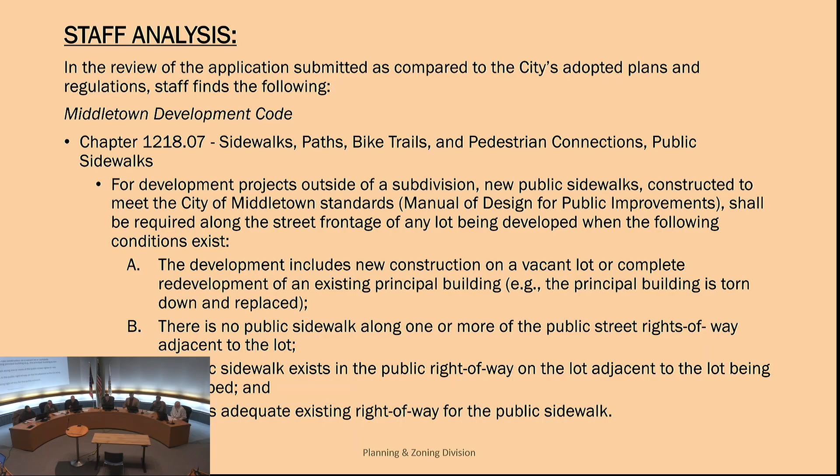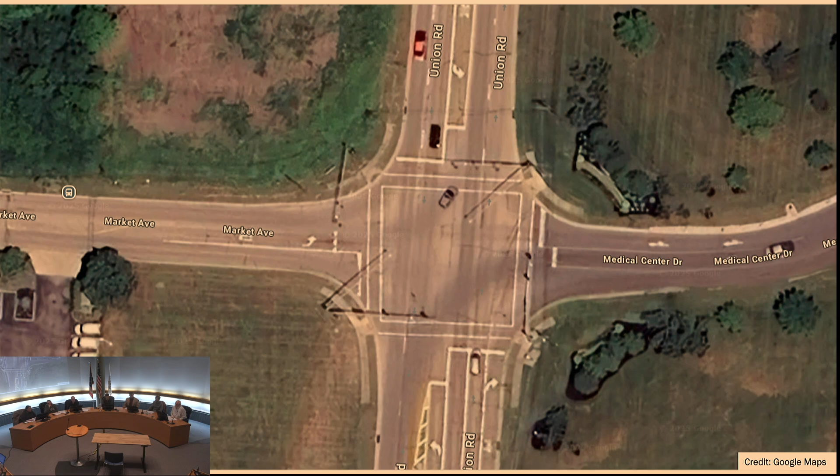There is no public sidewalk along one or more of the public street rights of way adjacent to the lot. A public sidewalk exists in the public right of way on the lot adjacent to the lot being developed, and there is adequate existing right of way for the public sidewalk. Here is a Google map screenshot of the intersection of Union and Market, showing existing sidewalks on each corner.

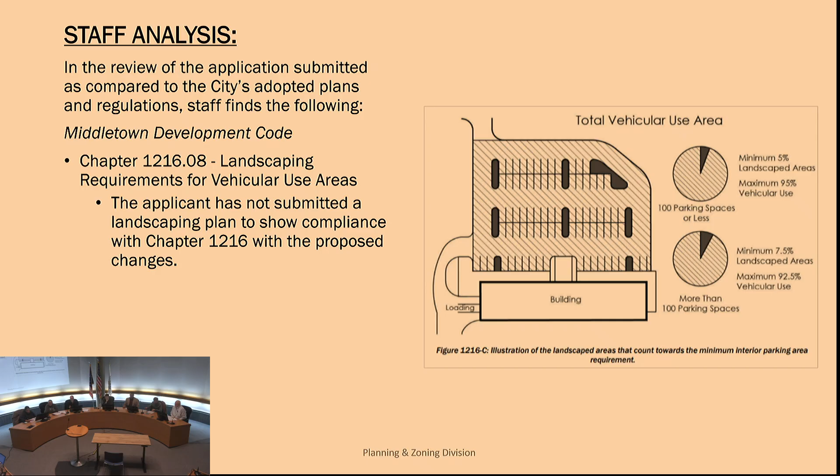Getting into chapter 1216, our landscaping requirements. The applicant has not submitted a landscaping plan to show compliance with chapter 1216 with the proposed major amendment.

Getting into the future land use, this property remains in the employment mixed use area where residential is a secondary use envisioned for this property. Additionally, this property is in the Renaissance Development Opportunity Area.

No public comments have been received via phone or email. Fire department had a few comments.

Based on the revised site plan, access to the apartment building in the center of the development, above or north of the pool, may be challenging with the layout of the parking lot and turning radii of the responding fire trucks. Drive aisle widths were not submitted for the parking lots to understand if a 50-foot long fire truck can maneuver the parking lots during an emergency response.

At minimum, the drive aisle should be 24 feet in width to accommodate a fire truck in operation. A fire hydrant must be within 100 feet of each fire department connection for each building in the development.

Public Works has stated a stormwater management plan will be required. And during a winter storm event, cars parked parallel on the public street are likely to be snowed in as the city plows the road.

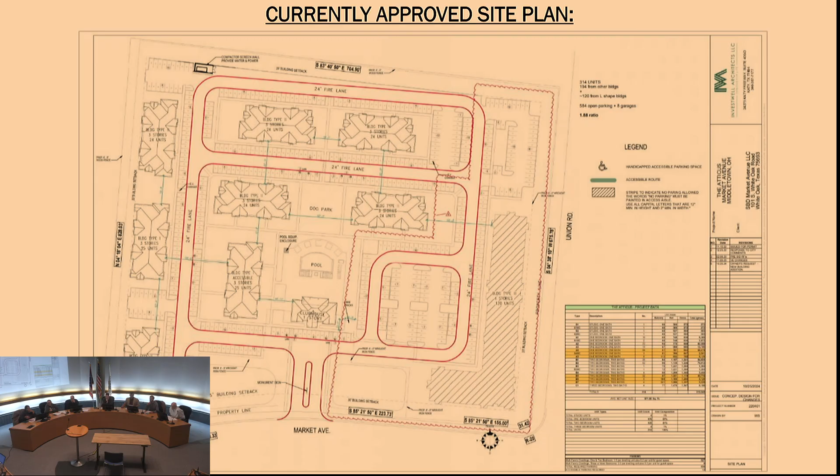Looking immediately at the fire department's comments, the drive aisle should be at least 24 feet in width. I know in the previous approved site plan, the outlined red area is marked 24-foot fire lane. However, I cannot confirm in terms of the parking lots if there were to be an event in a parking lot that they needed to respond to. I cannot speak to the other items at this time.

Thank you. But the last ones under Public Works, because that wasn't a public street, Public Works wouldn't have been moving snowplows through there at that time.

Do we have any other questions that can be addressed to staff? No? I had one.

We mentioned not knowing within the parking, I believe it was the amount of space. So is that folded into the fire department's review, when you look at the staff recommendation, is that all kind of together there? Because that was mentioned previously, and then the fire department mentioned wanting to see that, so it was in that recommendation. They have to be in compliance with the Ohio Fire Code, and I'm pretty sure our parking code, Chapter 1218, aligns with the Ohio Fire Code, if I recall correctly. Thank you.

All right, if we have nothing else at this time, we'll move forward with the public hearing. If you would like to come forward and speak in favor, please do so at this time.

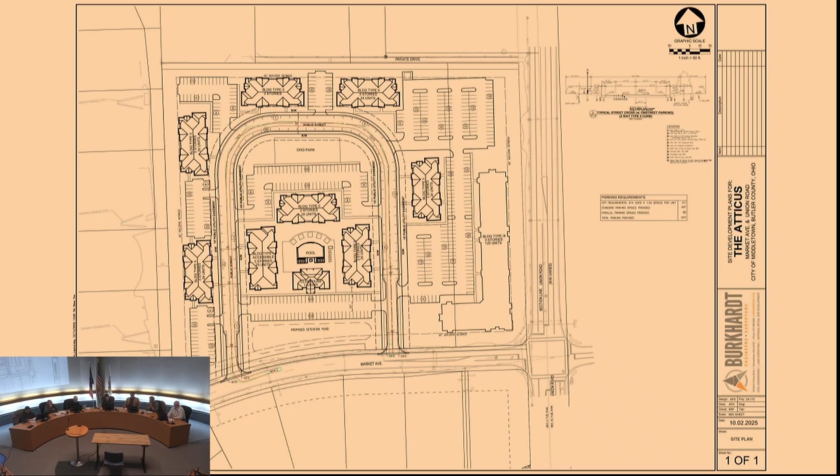I would agree. I think especially based off of the staff recommendation, it seems very logical. As we were going through the report, those were the first things that were sticking out to me, that we would have that as part of our approval. The fact that as we went through the packet, it did seem that most of the items that had firm numbers, the applicant was not only meeting but exceeding everything. That would give me confidence they'd be able and willing to do so with the remaining items. So personally, I would be good with approval based off of the stipulations provided by staff.

Do I have a motion? I'll make a motion to approve with the conditions outlined in the staff recommendation attached.

Mr. Parsons, yes. Mr. Mintel, yes. Mr. Daniel, yes. Ms. Griffith, yes. Mr. Cash, yes. Ms. Ramsey, and Mr. Shainline, yes.

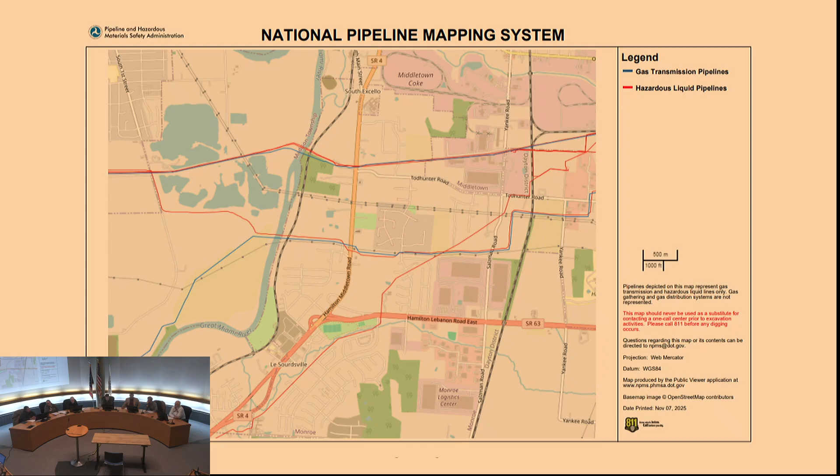Getting into the definitions here: manufacturing and production with caustic or hazardous material is defined as an establishment that is defined as manufacturing and production, heavy or outdoors use, which in the zoning code is above, but that also utilizes caustic or hazardous materials as determined by the Development Code Administrator. Manufacturing and production, heavy or outdoors, is more heavy in nature, or can also occur outdoors as compared to those that would occur solely indoors, and there may be potential to produce noise, dust, glare, odors, or vibration beyond its lot line.

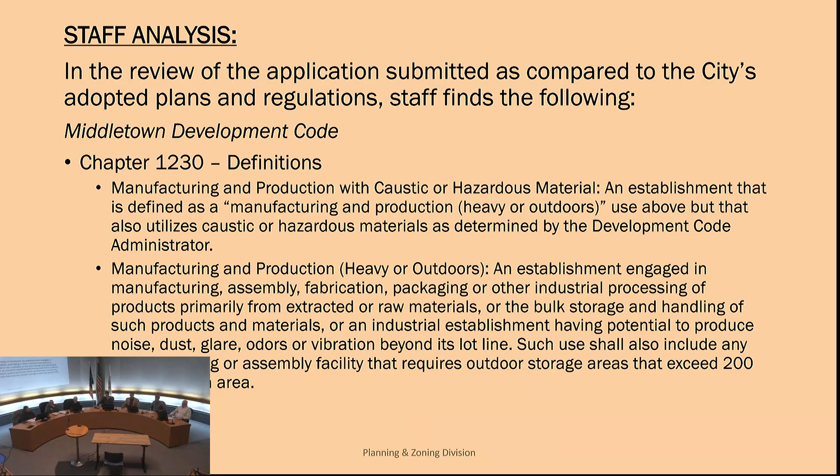So getting into the proposed use, the applicant proposes to use the property to develop a food and dairy waste to renewable energy project. The proposed project will utilize approximately 26 acres of the subject parcel, and includes an organics preparation phase used to break down food and beverage waste to prepare it for anaerobic digestion, an anaerobic digester where food and cow manure are combined in a tank and heated under anaerobic conditions, which produces biomethane and other outputs through a process called anaerobic digestion. A digestate solid separation facility, liquid fertilizer holding and closed storage tanks, and piping and equipment necessary to refine and distribute natural gas into the existing natural gas distribution pipeline located underneath the parcel.

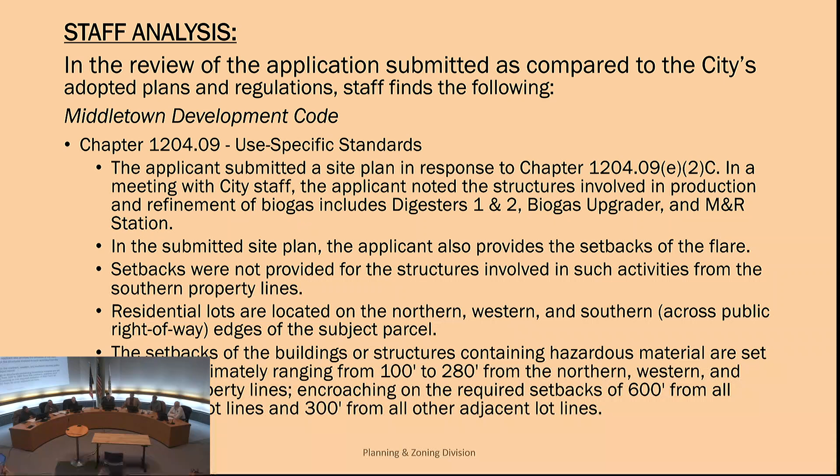As for landscaping, landscape buffers should only be required along lot lines that are adjacent to lots located within Middletown municipal boundaries or are located adjacent to residential subdivisions, regardless if the subdivision is within Middletown municipal boundaries. The properties to the south and west are not within the city of Middletown's municipal boundaries, but however, Butler County Auditor's website identifies the residential parcels to be platted.

The applicant proposes to buffer the southern border of the subject parcel with 9 Norway spruce evergreen trees, 3 Ohio buckeye overstory trees, 3 American linden overstory trees, 12 gray dogwood shrubs, and 25 shrubs, I'm not going to say that name other than Allegheny, in the 2 open areas that are not currently buffered with existing vegetation.

To the west that exists—I'm sorry. Based on the site plan submitted, the applicant does not intend to disturb the existing vegetation to the west that exists between the proposed development and the existing residential parcels.

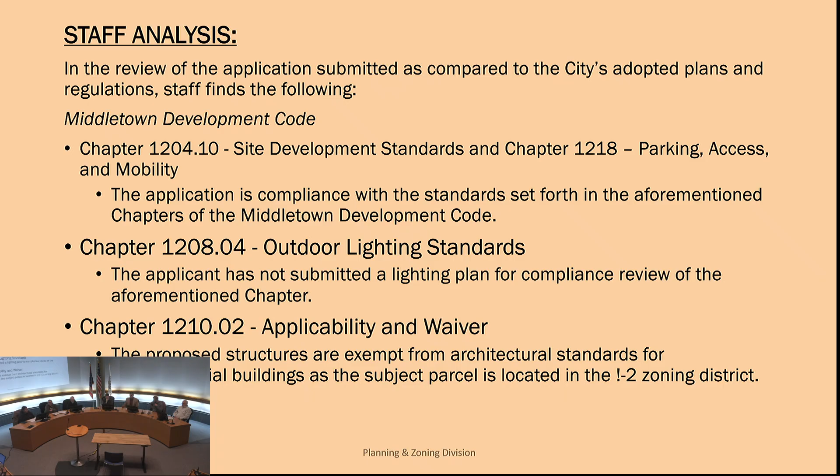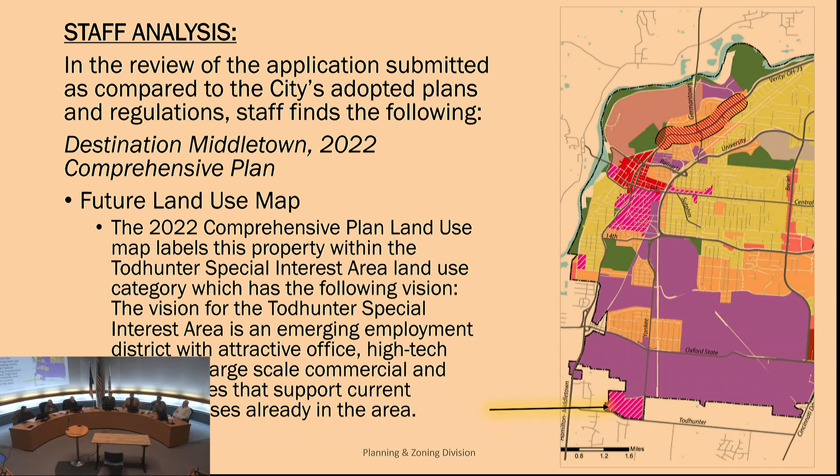Getting into our comprehensive plan, the subject property is within the Todhunter Special Interest Area land use category, which has the following vision: an emerging employment district with attractive office, high-tech, industrial, large-scale commercial, and medical uses that support current industrial uses already in the area.

This is also located within the city's Greentree/Oxford State Road Development Opportunity Area, which is just the broader land use division.

For public notice, I did receive 3 comments from surrounding property owners, 2 phone calls and 1 via email. All property owners discussed concern regarding a manufacturing and production facility that will produce potentially hazardous material operating in close proximity to residential dwellings, as well as conservation efforts for surrounding areas.

In addition to the concern expressed, one property inquired on the proposed timeline of construction and operation of the facility, as well as the proposed height of the storage tanks, which will be on the southern half of that parcel, closest to the residential properties to the south of the subject parcel.

Getting into other department comments, the Health Department has stated the city should be mindful of the pollutants our current and future industries are releasing into the air, ground, and water to ensure public health is protected. What sounds can be expected for surrounding property owners and businesses?

Community and Economic Development Department has stated: ensure all waste in the tipping area does not leave the facility and litter the subject property or surrounding properties.

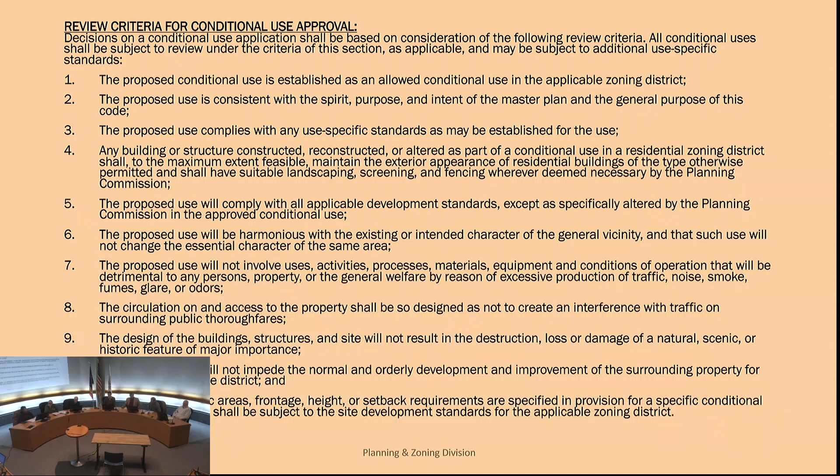Here is the review criteria for conditional use approval, along with additional criteria and conditions regarding the time limit. Should this be approved, there will need to be consideration as well for a time limit extension, as the permitting process and construction drawings will take the applicant quite a while.

And lastly, the appeals section for any entity claiming to be injured or aggrieved by final action of the Planning Commission. And that will conclude my staff report.

Thank you. Do we have any questions from the board that can be addressed to staff at this time?

Can you elaborate on the time limit, the thing you were just talking about, just a little?

Yes. When I spoke with the surrounding property owner, there were questions on the time limit or time frame for this project. When we met with the applicant last week, following Planning Commission's approval, the drawings of the development would take place, and then they'd start to seek Ohio EPA approval as well as local approval. That would take up to 6 months. Construction is slated to begin in April 2027, and slated to open in April 2028.

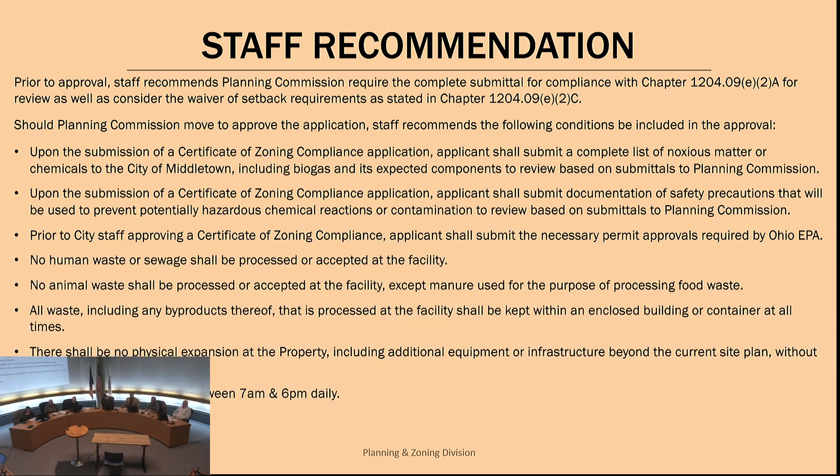So Claire, the setback lines - the required 600 and 300 foot setback lines - if this were approved, there's not a variance that's required; this would just be part of the process of approving the conditional use. Planning Commission has the ability to waive or modify various requirements, so that could be covered under your approval. If you do not include that in your approval, it would have to be a separate variance approval.

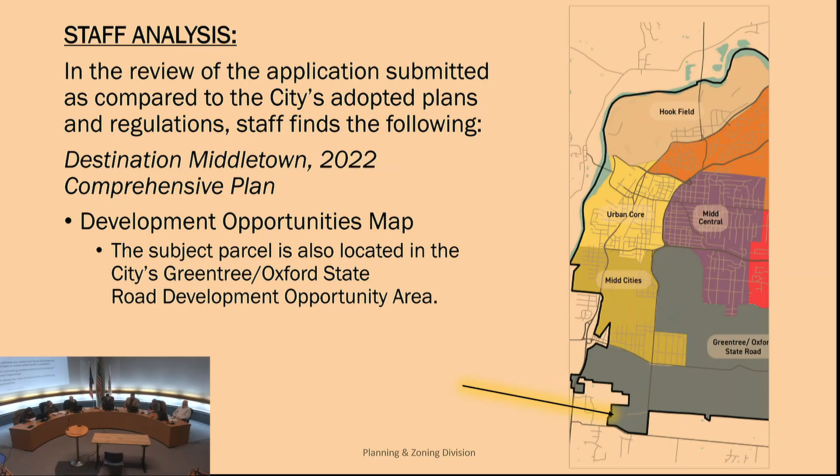Claire, could you - as part of the Todhunter Special Interest Area, it mentioned within the vision there being high-tech industrial. Can you touch on what some of those general uses might be?

You're typically looking at more advanced manufacturing. I'm not fully versed in industrial uses, maybe more of that development and research type - what you see off of 75 with the Cleveland Cliffs research and development facility. But outside of more futuristic industrial uses, it's broad. Kind of talking like data centers, things like that, or?

I really don't know. I can't answer that, since I don't know when data centers became a recognized land use. I can't recall if that was truly a thing in 2022 when this was developed, or if it's more of a new emerging development. That makes sense.

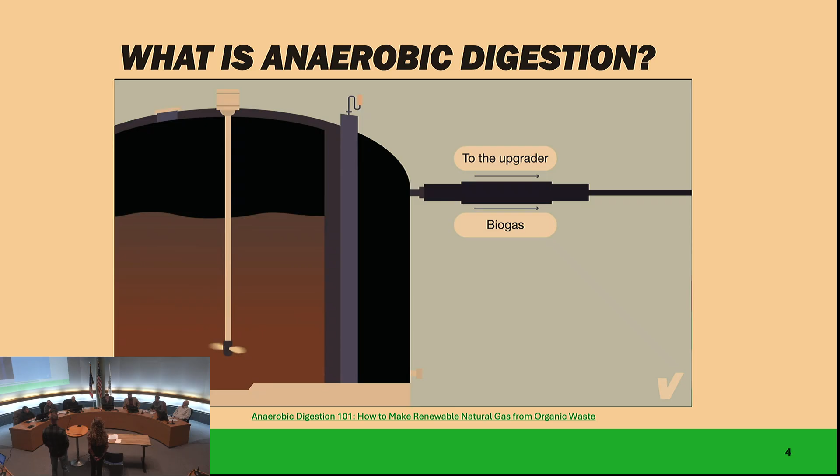In an upgrader, unwanted gases like CO2 and H2S are removed. The result is pipeline-quality renewable natural gas, which enters the existing gas pipeline infrastructure, providing local homes and businesses with renewable energy. Liquid remaining from the anaerobic digestion process is piped to the solid separation building, where it's divided into liquid and solids. The liquid is used as low-carbon liquid fertilizer for crops, replacing chemical fertilizer. The solids become clean, comfortable bedding for the cows. With the help of food and beverage waste providers, we're transforming harmful, inedible waste into a tool for fighting climate change and helping to sustain America's family farms.

All right, so just one clarification there. Many of our sites today that are operational use dairy manure and are located on dairy farms. In this case, we're going to seed the tanks initially with dairy manure, just to really bring the bacteria into the system. And from that point on, once we have that bacteria colony built up, we have no need for ongoing manure. In the process, it's more of a benefit to the farms that we've worked with in the past.

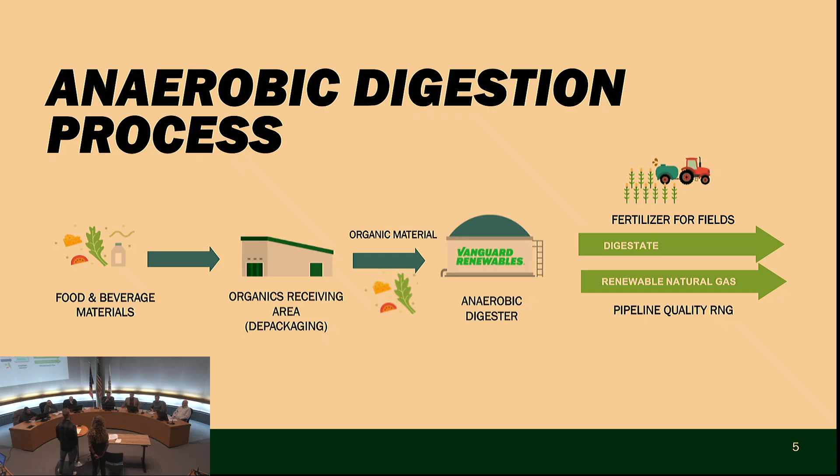So a big misconception about our facilities is the type of materials that we process. A lot of people see what we do and assume that we're like a municipal wastewater treatment plant, taking in human waste or biosolids. That is definitely not the case. Everything is, like I said before, off-spec food. Similar things like beverage waste, dairy products, fats, oils, and greases, all biodegradable materials that enter the digester. Inorganic materials like plastic, trash, bone, shells, all of that stuff is removed prior to the digestion process.

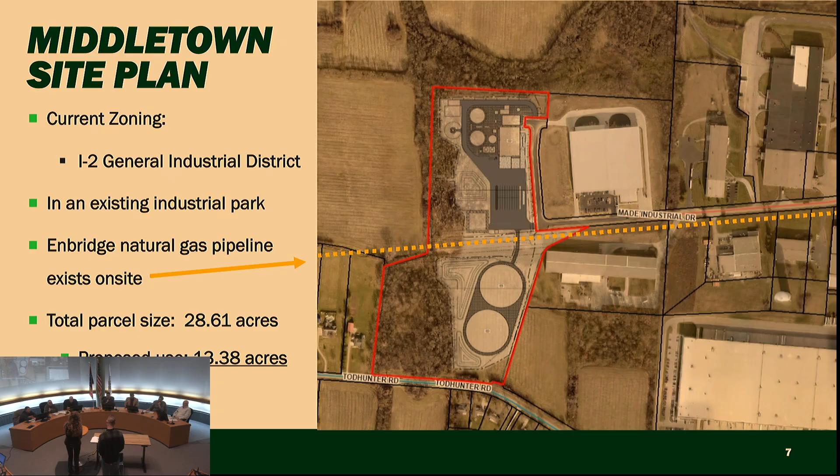I am also going to call on John Penchorn, our professional engineer from Stantec.

Good afternoon, good evening. My name is John Penchorn. I'm a civil engineer with Stantec. My address is 2321 Club Meridian Drive, Okemos, Michigan, and I have been sworn in. This is a really exciting project. Thanks for your time tonight.

So you can see in front of you the site plan that we've proposed for this facility. Just walking through it at a very high level: on the north side of the site you can see a rectangle labeled Organics Receiving Area. That is the primary building that most of the facility operations will interact with, and the trucks bringing off-spec food materials to the facility will be delivering to that building.

There are a few different ways they do it. There's a couple of dock doors, an overhead door for trucks that drive all the way into the facility, and a pad for liquid offloading as well, kind of a hose system. All that material makes its way into the facility, where depackaging and a lot of the magic happens to turn it into the slurry that is put in the anaerobic digester, just like that video walked you through.

One prominent feature to point out is the leg of Made Industrial that goes up to the north, along the east of our facility. It's existing infrastructure that's relatively recently built. It contains water, sewer, storm sewer, and is designed for truck traffic.

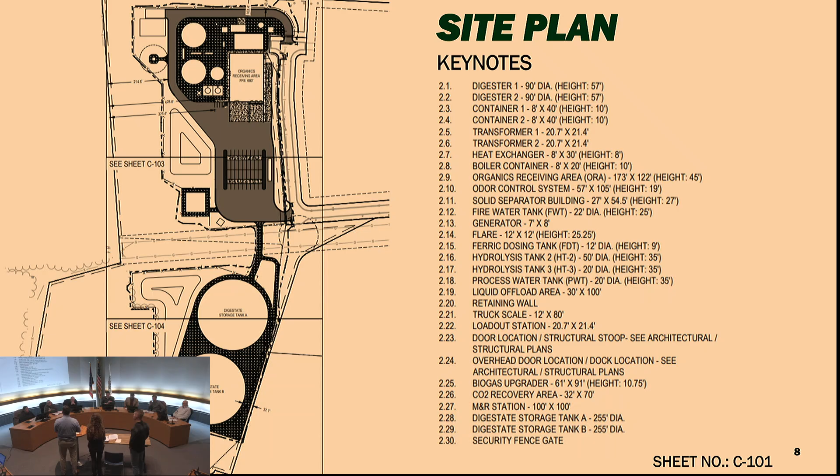South of the Enbridge pipeline, you see two large circles. That is digestate storage tanks. The byproduct of the digestion process is this material we call digestate. It's somewhat of a fertilizer supplement, and as much as we'd love to spread it on farm fields year-round, winter does exist, so we need storage in some capacity to store that digestate material there.

If you could actually jump to the next slide, please. We already covered this. One more, please.

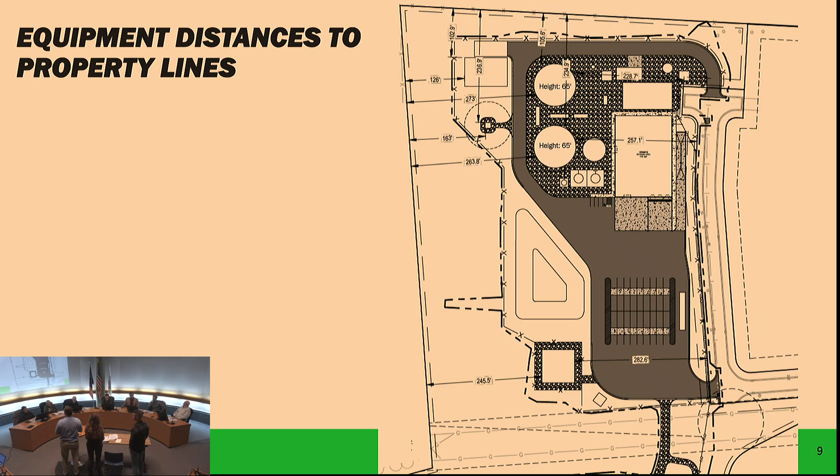Speaking through some of the engineering components of the plan, at least from a site civil perspective, currently the site drains east to west. Dix Creek runs up the west side of the property, so we're following that natural drainage pattern. You can see there are two different stormwater basins proposed, catching the vast majority of runoff from the site. Those are both wet ponds, meaning there's a permanent pool there year-round, which helps trap sediment.

Erosion control is kind of typical for a project like this. We're using erosion control blankets on any slopes that are 5 to 1 or steeper, just to make sure we're able to get grass to take as quickly as possible and minimize the potential for erosion. We're calling out inlet protection, which are silt bags that sit in inlets across all the inlets in the project and adjacent in Made Industrial Road for the first couple hundred feet, plus silt fence where needed around the perimeter of the project. That's kind of a high level overview.

From a storm sewer perspective, we're actually not proposing a connection to the city sewer. It would all drain into the ponds and then into Dix Creek eventually.

From a sanitary and water perspective, we do propose to use the existing utilities within Made Industrial Drive. We'll be able to make that sanitary connection out of the ORA building. I want to note for the commission that the sanitary is only bathroom waste—none of the processed water goes into the sanitary at any point. Water service will come from that as well. There are existing hydrants built along Made Industrial. We're working with the fire department, and our understanding at this time is that those may be sufficient for the facility. Certainly if they feel more is required, we'll work with them to make sure we're in full compliance with city standards, and I'll be happy to take questions at the appropriate time. Thank you.

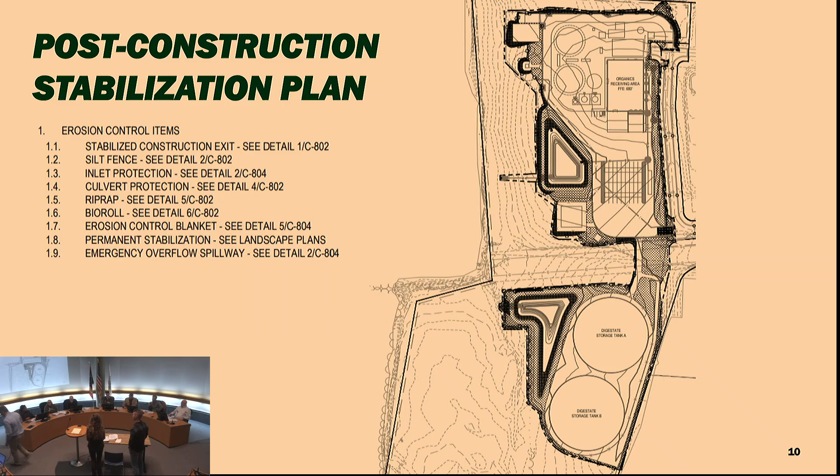One of our frequent questions about these sorts of facilities is truck traffic. I'd like to clarify that all truck traffic entering this facility would come from the existing industrial park located along Made Industrial Drive. Currently, that industrial park is improved with multiple other industrial facilities also utilizing similar equipment and trucking needs. No entrances would be located from Todhunter Road, so all industrial trucks would enter from Made Industrial. I'd also like to add that all trucks entering this site would be fully enclosed—there would be no loads open to the atmosphere if smell is a concern.

Odor control is something we take very seriously at these projects. It's the number one potential issue of food waste projects—rotting food waste smells bad. So inside that building we have a very sophisticated odor control system. We also utilize constant air changes, negative air pressure, and fast rolling garage doors so that none of the odor inside that building can ever escape. You can see right here, about the size of a residential house, an odor control filter on the back end of the facility where all the air is cycled through constantly throughout operations. We even section off the areas where waste is dumped on the floor to be processed, with extra walls to keep that space separate from the rest of the facility, where we have storage of pallets and other things, with extra intensive odor control in those areas—once again to ensure no odor can ever escape from the building.

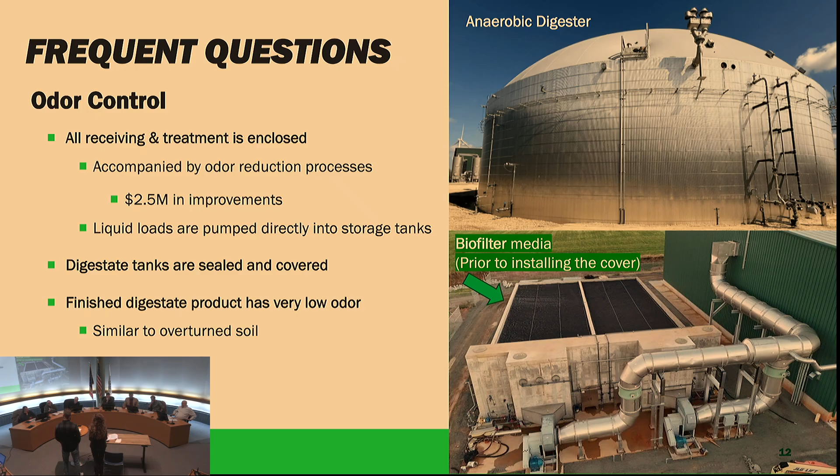Getting into the community and environmental benefits our facility brings: renewable natural gas is renewable energy, domestically made fuel from what would otherwise be wasted and emitted into the atmosphere. We see that as a big positive.

We support community improvements and ways to get involved, whether it's sponsoring local sports teams or contributing to community projects like bike paths and fields.

Creation of jobs: during construction there will be between 50 and 100 jobs over a 12 to 15 month period. Permanently, there'll be about 8 to 15 salaried positions across the site—8 directly on site. We also purchase a fleet of trucks, so there will be logistics coordinators, truck drivers, and more. This project isn't seeking any tax abatements or local incentives, so we're ready to pay our full share of property taxes, with a roughly $60 million investment in this facility.

Another local benefit is the diversion of waste from landfills. Local landfills all over the country are filling up, and permitting new ones is very difficult. If you can take 40% of that waste and divert it to facilities like ours, you can preserve the time it takes until that landfill is full.

The last big benefit is for the local farming community. The digestate is a high-quality, low-odor fertilizer with many of the same benefits as manure or turkey litter, which have really intense odor and can be a nuisance. This gives farmers an option to get that same organic material that's beneficial for long-term soil health and crop yields, without the nuisance.

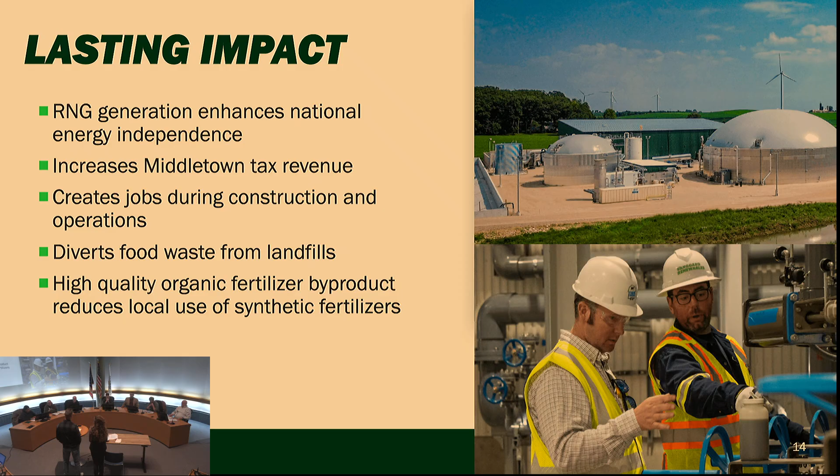Next, I would like to call up Professor Greg Soltis.

Good evening. My name is Greg Soltis. I work at Cleveland State as a professor of urban planning and urban design, and also at RDL Architects as a senior designer. It's 21111 Chagrin Boulevard, Suite 110, Beachwood, Ohio 44122.

The analysis is based on looking at your zoning code, and also Monroe's, since some parcels are adjacent; the comprehensive plan completed in 2021 and adopted in 2022; the Middletown Energy Plan, which was mentioned in the comprehensive plan in 2019; and the historical and contextual analysis of how your city and land use evolved.

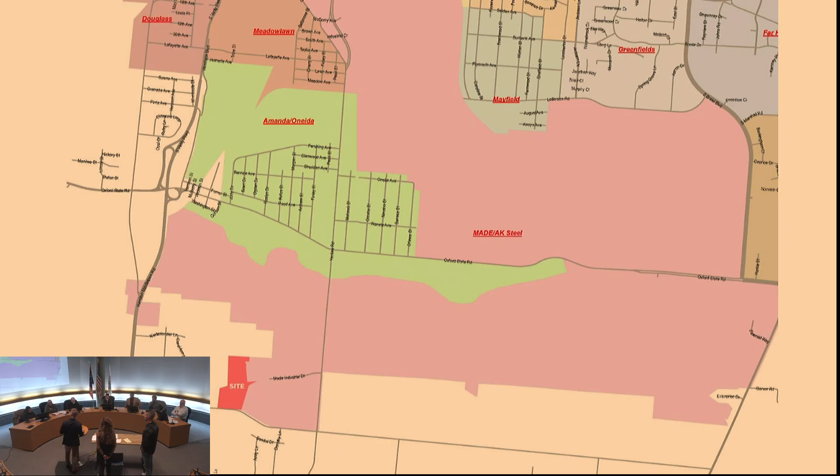Alignment with the Middletown Energy Plan: it promotes local resiliency, uses local sources to create energy to put back into the local economy and used locally, which makes Middletown more energy secure.

On economic development goals, this creates local jobs and reinvestment opportunities. It strengthens the industrial base and city competitiveness, and delivers long-term cost savings through energy efficiency. With business retention and innovation, it positions Middletown as a regional leader in sustainable manufacturing and the circular economy, and provides energy to other businesses close by.

Alignment with the comprehensive plan: this is a high-tech use more related to agricultural and energy uses, so it fits within the spirit of the district, the history of the district, and how it's evolved. It is supported by all the infrastructure put into that area to attract industry.

With regard to land use and office, the city released an RFP to study downtown and strengthening downtown, so it might be a better fit for that type of office to be targeted towards downtown, to revive downtown rather than to create office on a greenfield site out here.

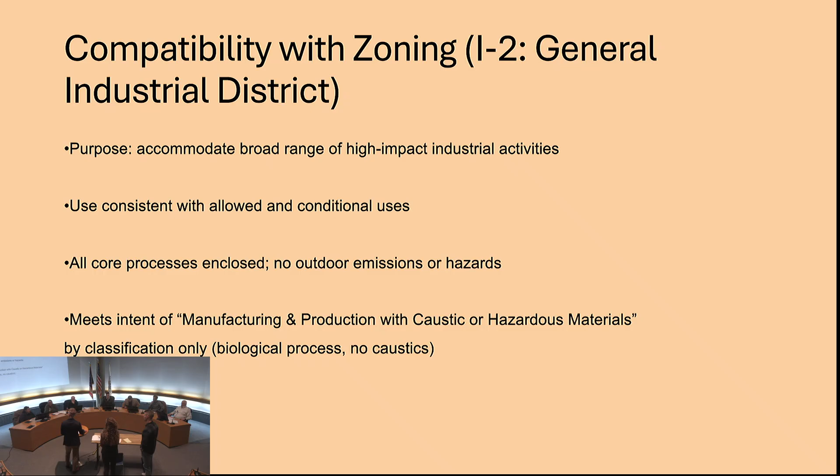Without going through all of the conditional use review criteria, most of what I presented today speaks to these things. It's allowed as a use, and we're reviewing it as a conditional use. It is consistent with the zoning code and with the master plan, and it meets the use-specific standards of no hazardous materials.

There's proper buffering and screening because there's the existing forest area to the west and planned buffering on Todhunter Road. The forested area on the west is pretty intense - we were at the site recently. It complies with development standards, and it's harmonious with the area and character, and definitely harmonious with the morphology, the evolution of Middletown and your industrial heritage.

No detrimental impacts - odor, noise, traffic. They discussed that already; the odor and everything is contained inside, so that doesn't affect the neighboring areas around it. Safe access and circulation via Yankee Road only and up Made Industrial Drive.

No loss of scenic or historic resources. This area, as far as I could tell by researching, holds no historic significance since the settlement of Middletown, and we're preserving most of the trees on the site. It doesn't impede orderly development - it fits in with the development happening within the MADE District and on Made Industrial Drive, and it will conform to site development standards.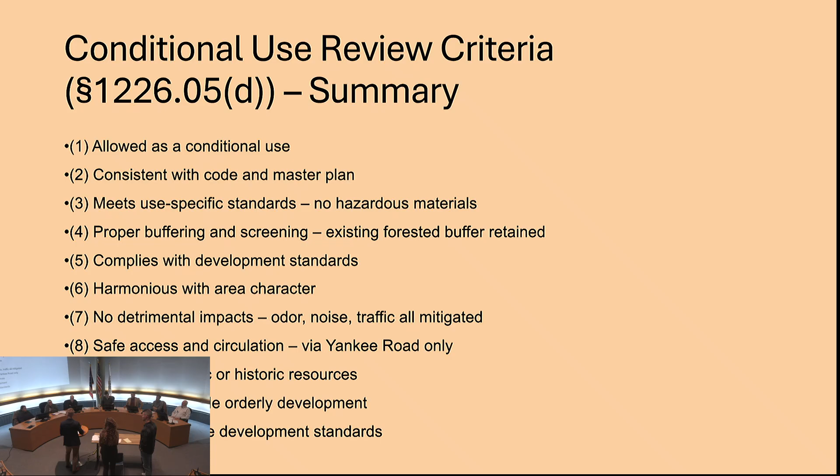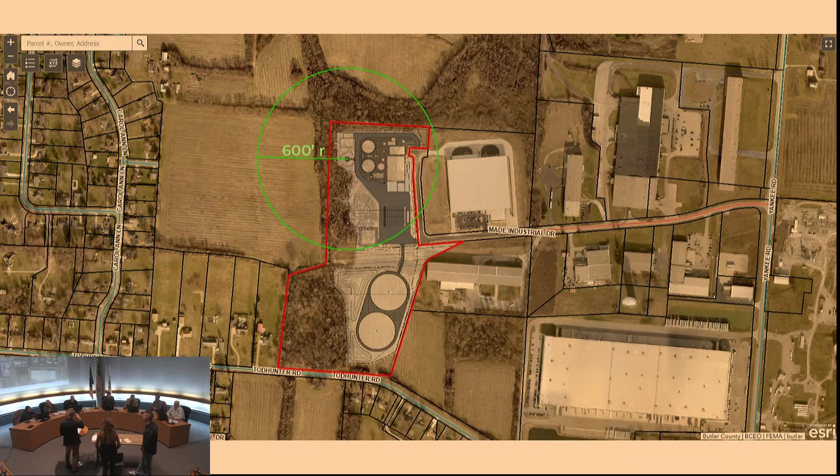We have a close-up aerial here so you can see the site, which is the shape in the middle, to see context and how the agricultural land wraps the west and northern part of the site. The more suburban rural area in Monroe is to the south of the site.

As already discussed, when looking at zoning, Monroe's residential zoning has different standards than Middletown's, obviously because Middletown is much more urban than Monroe. This use acts as a transition between the rural and industrial forms.

The development will be concentrated in the northern half of the parcel, keeping it away from the residential that does exist. There's that mature woodland, which we mentioned already, and it maintains a natural separation from rural and residential lands. Next slide. That's it. So if you have any questions, I'd be happy to answer them.

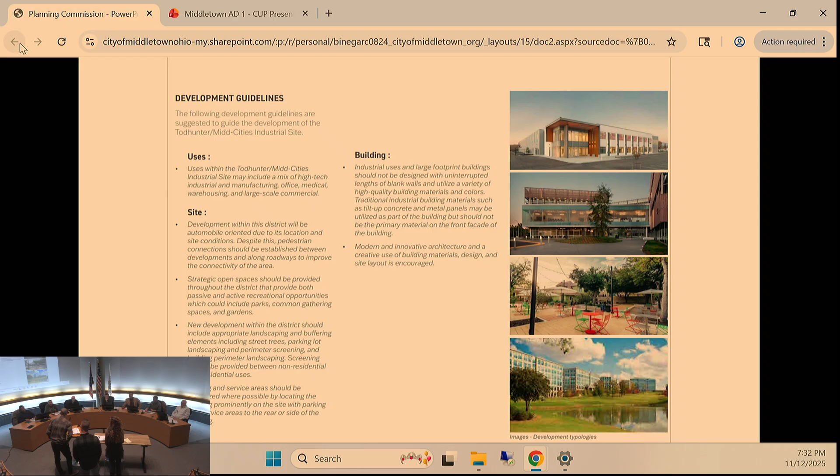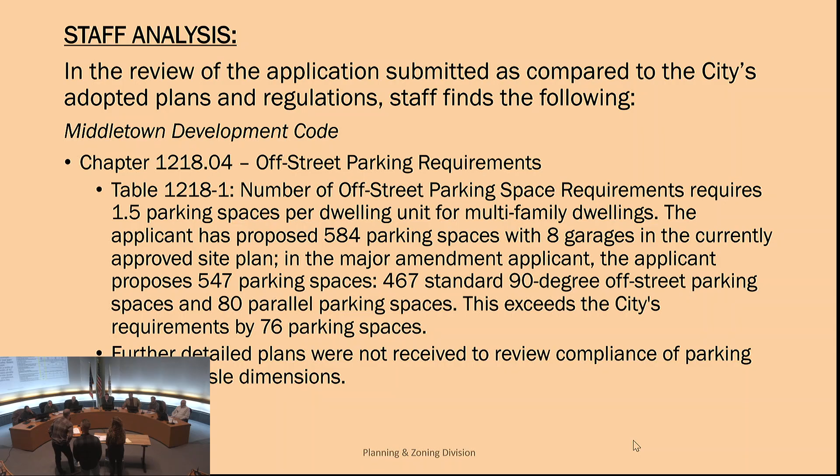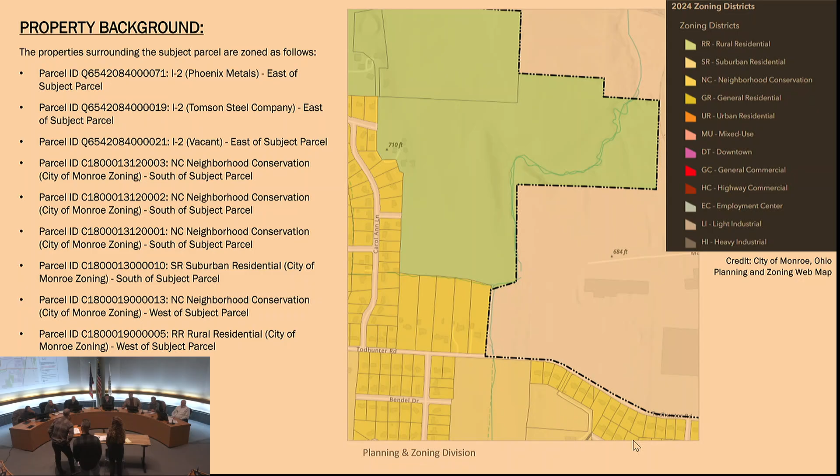So we have experienced some spill incidents in the past. Of course, with every sort of incident or event that occurs at one of our facilities, we take it very seriously. We investigate it, we come up with corrective action and preventative action plans, and we take those lessons and incorporate them into future projects. For example, in the past we had a spill associated with a line that broke in the winter season. We had very cold weather, the liquid inside the line froze, and it subsequently broke the line. Moving forward, we're insulating all of our lines to prevent similar incidents from occurring.

To follow up on that, not that particular issue, but if you have an accident like you just described, are you required to report that to the Ohio EPA? Typically, a regulatory agency such as the Ohio EPA will set reporting limits associated with chemicals or food waste that is spilled. So depending on what's outlined within our permit, that will establish the reporting limits, and our company is 100% committed to following the requirements inside our permits and reporting necessary spills to the agency.

I just noticed one more question here. So you guys plan to take food waste, take it out of its packaging, and then process that. What happens to the packaging?

Yep, so all of the things like cardboard, aluminum, and plastics are all put into balers and recycled. We have a whole station inside that building where you've got guys ripping off the cardboard from the boxes. You have can crushers for all the aluminum cans, and as much of that stuff that can be recycled through conventional recycling is done.

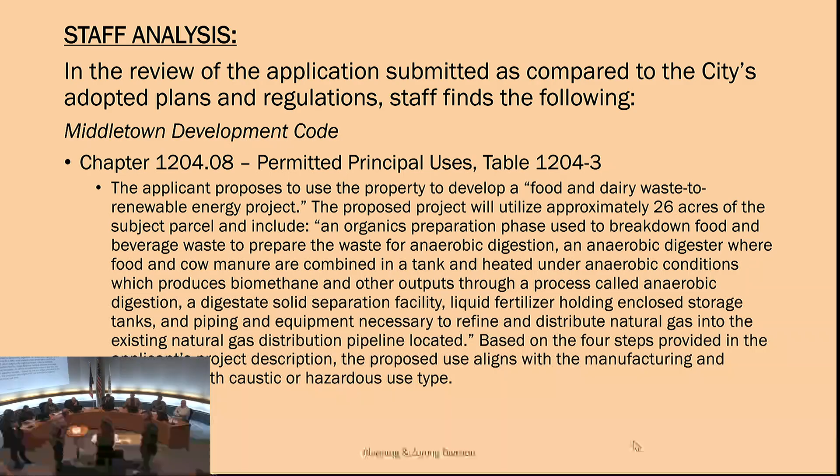Something important to note is that with every one of our projects, we create a site-specific safety plan and an emergency response plan that incorporates and considers all potential emergencies that could occur on site, the controls we have in place, and the resources we'll use to ultimately mitigate the potential emergency. We partner with local emergency response services to outline the project and go over the scope of operation, to ensure the necessary resources are there to assist in the event of an emergency. As it relates to biogas, it is of course hazardous in nature - it does contain the H2S component.

I think it's really important to focus on the controls that we implement on site. We go through what's called a HAZOP analysis within the development phase of the project, where we consider our processes and the hazards associated. From those HAZOPs, we typically implement over 70 critical safety controls within our project.

Those can include interlocks, e-stops, gas meters to understand temperature, pressure, constituents inside the digester. With all those variables being considered, we can monitor the health of our system and our process. As we look at the data, if we find anything concerning, we can intervene and potentially stop and eliminate potential emergency situations from occurring.

In addition to that, we also use what's called intrinsically safe equipment on site. That means this is equipment that doesn't create a spark, and doesn't build up enough heat to create a potential fire or explosion on site. Anaerobic digestion, in and of itself, lacks oxygen. Of course, in order to have fire, a component that's needed is oxygen. So in and of itself, it's a relatively safe operation. Hope that answers the question.

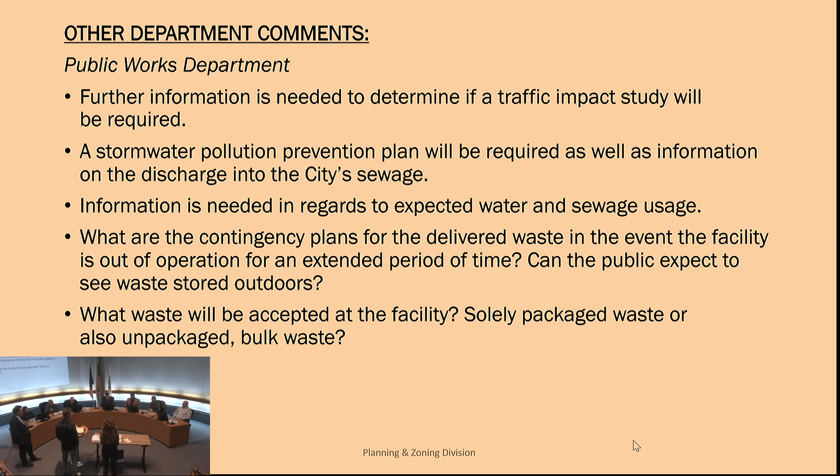And then the fire department has a question where they ask, are there plans for future expansion? I know we're just talking about the initial phase here, but have you guys done an expansion at any of the sites that you own and operate, or just operate if you don't own?

So the only sites where we've done expansions, when Vanguard Renewables was formed, we purchased the first 2 digesters that were built in the state of Massachusetts. The technology is a little bit older and didn't have some of the bells and whistles and safety precautions and other things that we wanted, and so we did go in and upgrade those systems.

This system here is going to be designed to a certain size, which is the same size we're building across the country right now. And so outside of a small margin of excess capacity, we would have to come back here because we'd be building new structures and have an entirely different facility. So, maybe 10-20% room for the project to grow over time, but anything more than that, the equipment's not going to be sufficient.

Thank you. Actually, this is a point I wanted to address - this is the plan that we're before the Planning Commission for approval for. The applicant is still going through the value engineering. So in all likelihood, the final plan may actually shrink somewhat as opposed to expand.

And as Steve indicated, obviously we understand any major change, this is a conditional use, and the way we're permitted here is through conditional use. So if there would be any future expansion, we'd have to come back before the city and this body for an amendment of the conditional use. But the reality of it is these are very, very, very expensive projects. You don't go through it today with the idea that 5 years down the road you're going to expand it. That would be just horrible business decision making. It doesn't make sense to do it.

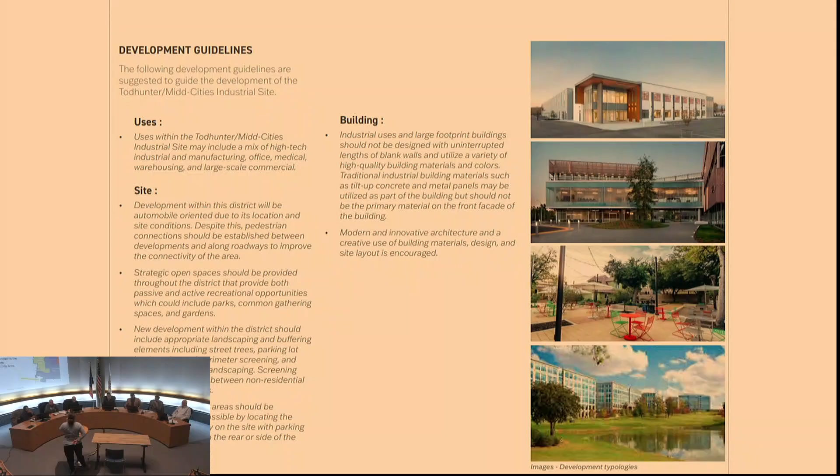So I can't complain about that. It did look like on one of the overhead views that they were closer to my property line than the recommended 300 feet. I think that was part of what the committee suggests, or I don't know if they require it. I know that you can grant exceptions to that. I'm not going to object to that necessarily. I know the facility is the size that it has to be, and it has to fit on that plot of land. To me, as long as you're not clearing any more of that forest, I'm not going to object to that either.

But yeah, as the surrounding property owner and potentially a resident, I may eventually live on the property. I don't know if there's any other residents here that are going to speak in opposition. I certainly respect their views and their concerns, and just want to be cautious with this project moving forward.

But thank you. Before you go, ma'am, just speaking as a fellow conservationist, restorationist, I combed through their landscaping plans that weren't shown up here. They're actually planting several native species of trees. I saw that, yeah, that's nice.

Also, they're planning on, open areas will be planted with native meadow, essentially, which would help with the habitat of owls. I think that all looked great. I have no opposition to that. That was certainly a huge relief for me.

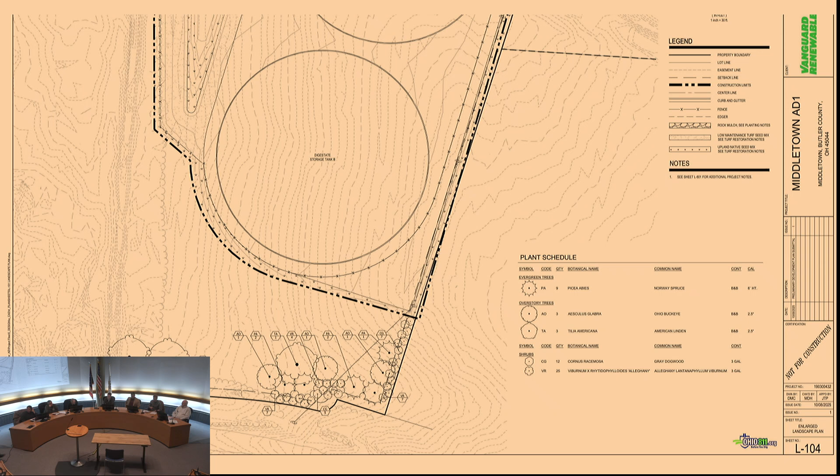I'm going to start - we'll look to who the right person is to answer. I'm just here to identify the questions as I wrote them down, and then whoever wants to answer them. Sure. The first question being the backup generator - so as far as that goes, all critical components, which would include the odor control system, run off a backup generator. Anything considered critical across the site is connected to it.

Okay, the protections for the digestate tanks - so the digestate tanks will be... Sure, hi, my name is Sol Luciani, address 133 Boston Pond Road, Western Massachusetts. I was sworn in at the beginning. I'm going to address this slightly differently, but the Ohio EPA requires the tanks to be covered and requires there to be some type of air treatment system on the gas coming out of the tanks.

So that's going to be covered by our permit. There's different options on what can happen with that gas. One is sending it to some kind of other control system, another is sending it to a flare. We wouldn't be sending it to the biofilter up there because of the distance involved. In that case, you'd install a localized carbon filtering system near the tanks instead of installing one up there. I think that covers that question.

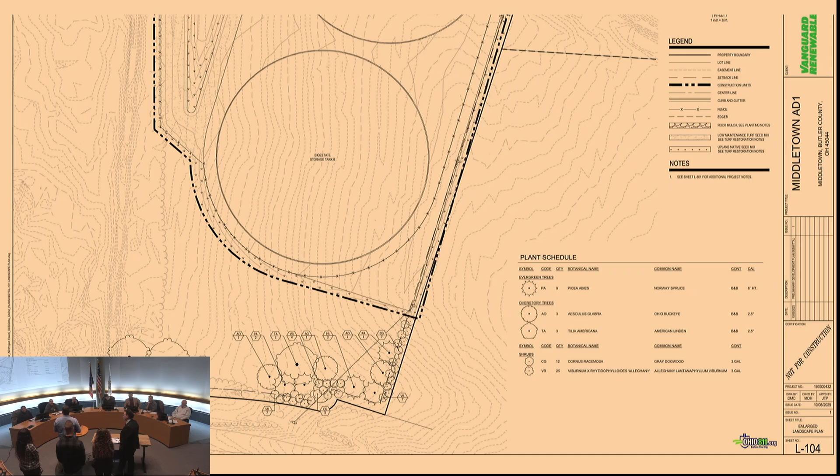But it will be constantly wet. You can sort of see the contours if you're familiar with reading contours, on the plan. So you've got a shelf of the pond that's constantly dry, except for after a rain event where it fills up. Then you've got a shelf that's partially a safety bench, so if somebody falls in, there's something to land on, and they're not just needing to know how to swim. And then you have a submerged section, which is where the vegetation will primarily be that you're talking about. And then you have the deep piece of the pond that actually holds most of the water for most of the year.

My question was, and it's okay if you don't know, are the species being chosen for bioremediation, or are you guys just going to be choosing species that are local to this area? Like, you guys are obviously very environmentally conscious, choosing local native species to seed the grassland with. But since we're talking in this context of contamination, bioremediation is the question. Is that something you guys have tried on any other sites? Or is that kind of a new concept to you, maybe?

I don't think I can speak to other sites necessarily. I would say the design's probably not detailed enough at this point where we've made decisions like that. I don't see any reason why we'd be opposed to it, though, so happy to work with DPW on those details.

Okay, thank you. And I apologize, I know it was covered within your presentation, I didn't get the exact figures that were thrown out. Could you just confirm one more time, at least in this preliminary stage, what the sizes are that we are looking at for the storage facilities?

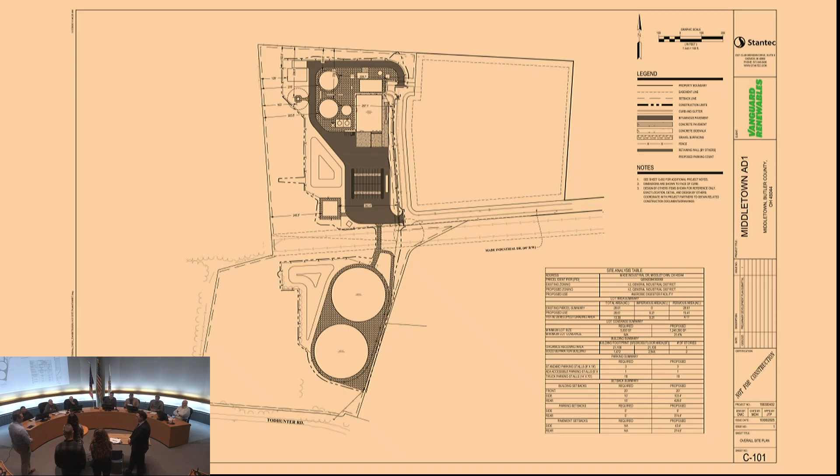Yeah, we tend to describe the noise of the facility as the humming of a pump, because that's mainly what you have outside. We did do noise studies at some of our other facilities, and all those came back good, meaning not over whatever the requirement was in that particular place. I don't have off the top of my head what the exact decibel number is.

That's understandable. All right, is there anything else maybe that we may have missed from the people who came forward, or any other questions that have come up that you would want to address?

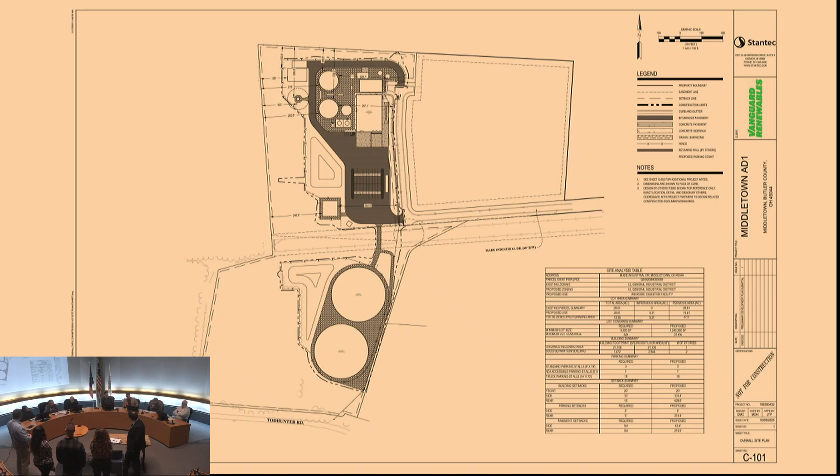Please. How far is- this picture's up conveniently. How far is the edge of your operations here from the adjacent property? I think you mentioned it earlier, but I can't remember. Is this the property then to the west? Yeah, right.

So what I mean is this. Yeah, so the shortest dimension that we're showing here is 126 feet, and that's from the west property line to the biogas upgrading piece of equipment, sets of pieces of equipment. So if you're looking for the shortest distance, it's 126 feet.

Right, okay, this is- obviously we can tolerate some variance. Is this as far away from the property line as it can possibly be? Is there any way to squeeze this closer? I know in some places there's not actually houses there, it's fields and pastures, but what I'm trying to get at is, are we as far away from the adjacent property owners as we can possibly be? I would say the answer to that is yes.

Just to give you a couple considerations, we are squeezed as tight to the north-south segment of Made Industrial Road as we can get. We're right tight to the building setback there, trying to fit all of our infrastructure in. So I would say the answer is yes. We are, as mentioned, working through facility engineering, about to jump into that stage, and I think we'd look to honor the number that we commit to here. We feel we're about as tight as we can get right now. Thank you, that concludes my super technical line of questioning.

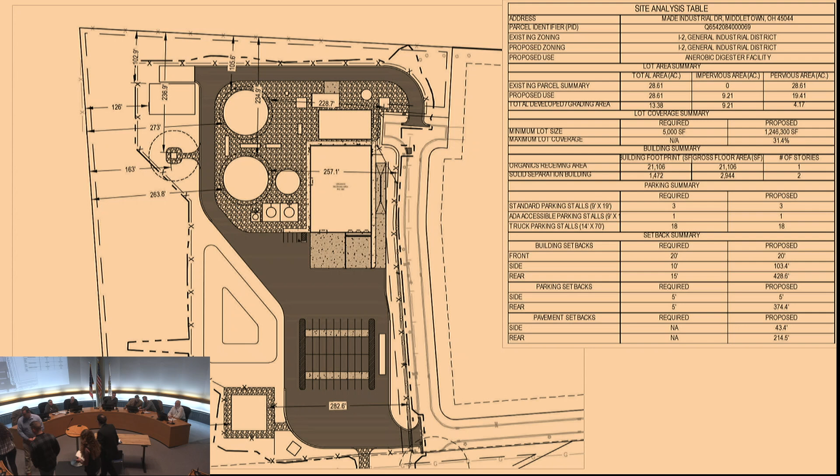Thank you, and I would be remiss if we didn't thank the citizens who spoke, our immediate abutting property neighbor supporting our application, and the other resident, for their level of engagement and understanding of the project. Thank you very much. Thank you.

All right, we'll now move to deliberation. Can you close the public hearing? Please, I will now close the public hearing. Now we'll move to deliberation.

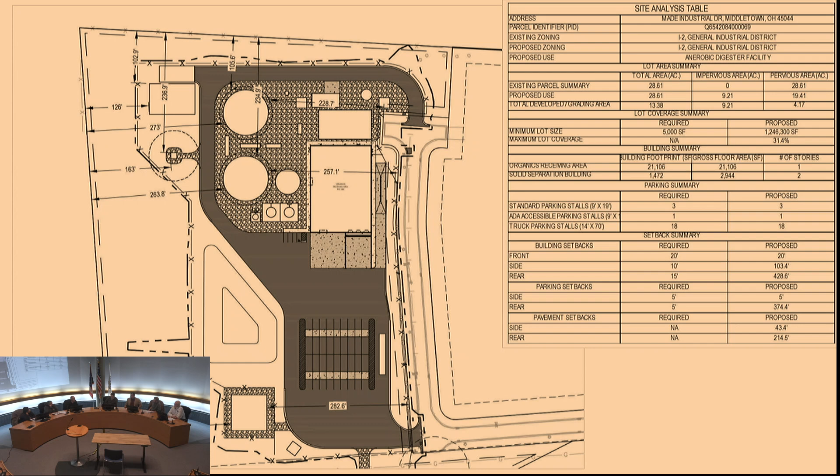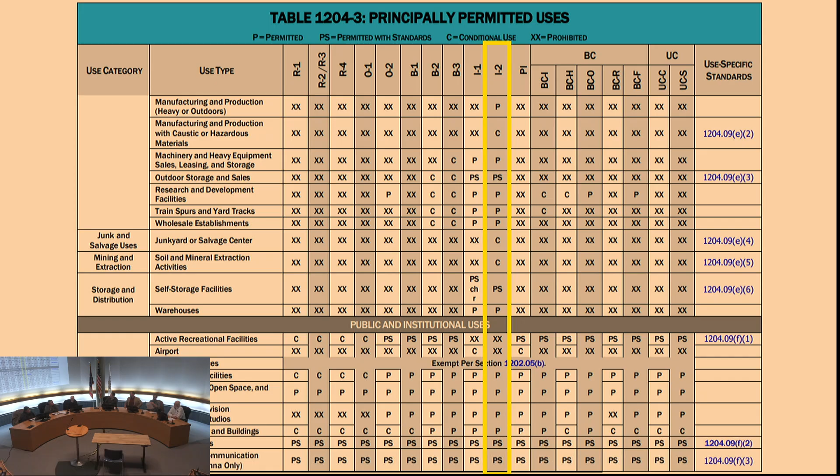Well, I thought it was very succinct. The only reason we're here is because this process involves hazardous or caustic materials. If not, other than the excess height for the tanks, which we really don't know what that is right now, there wouldn't be a need for a conditional use. So some of these other questions and concerns maybe aren't really that relevant to our decision making, because it seems like our only concern is the nature of the hazardous and caustic materials.

And it seems to me there are some caustic, natural gas- obviously I looked up the definition. Hazardous material is anything that can cause harm to people or the environment. So anything possibly could be.

Natural gas, it seems like that's fairly well contained. Ferric chloride and hydrogen sulfide, I'm not a chemist, so I don't have a clue. The hydrogen sulfide is a byproduct of the manufacturing process, and they detailed systems they have in place to separate it. I don't know if that was a proposed system or not, but there are systems they are aware of to filter that out.

And again, there's another system they pointed out where I made a note that they mentioned they can filter out the carbon dioxide produced through this process and turn it into food grade carbonation essentially. So it seems like they've got a pretty good grasp on this system.

Right, right. So it would seem to me that considering Ohio EPA probably has a stranglehold on these types of operations to ensure that they comply with all of their requirements.

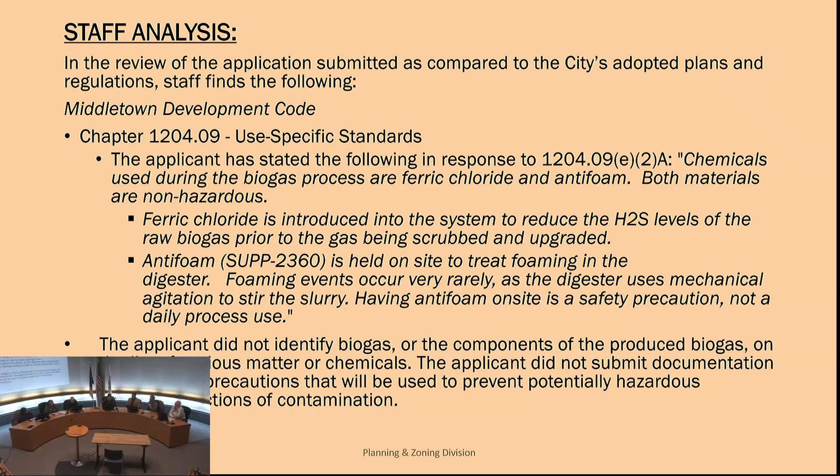To me, it appears to be a justifiable conditional use, subject to providing a list of the noxious materials or chemicals used during the manufacturing process and documenting the safety precautions that will be used to prevent potentially hazardous chemical reactions or contamination, which we've already heard how that's to be done. Maybe it's just a formality that it be provided in writing with this application.

Just one more thing about the hazardous materials. One we didn't mention was the anti-foam. I think that stands out the most to me, but that's just a precaution they have in case something goes wrong in the process. As the applicant said, it doesn't seem like they've had to use that at any of their sites in a number of years. I think seven was the number, I'm getting nods. So it seems like they have this precaution that they keep on hand. If that precaution were also to go awry, then you've kind of got some bigger problems, I think.

But if that's really the main thing holding us back, it's the precautionary use of a containment measure of some sort.

So to refocus the planning commission, the reason this is before you is because they are producing biogas as a byproduct, but they're still producing it, refining it, and then injecting it into a natural gas pipeline on the property. Staff would request that the applicant provide in writing the list of noxious chemicals or matters, including biogas as well as its expected components, to the city, as well as the documented list of precautions that will be used to prevent potentially hazardous chemical reactions or contamination during the conditional use process, as well as reaffirming that during the zoning permit application process for quality check, for the city to do our due diligence.

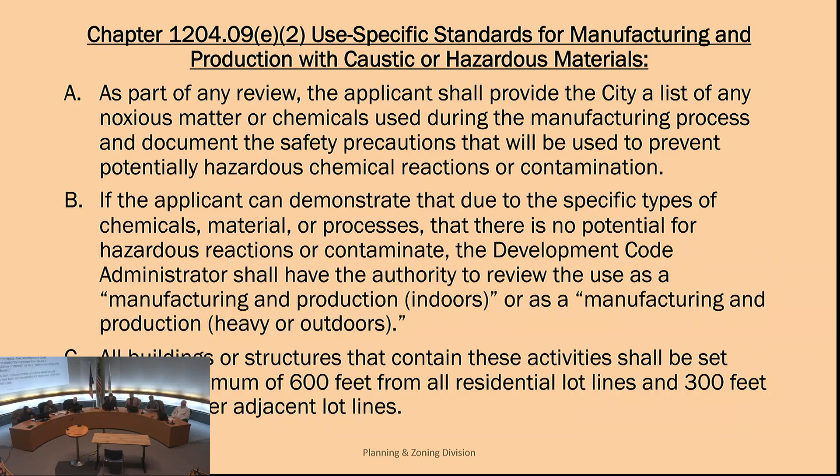Very good. That brings us to old/new business. Do we have any items? I do. I guess mine will be new business.

So this is my last meeting sitting here as a city councilman, as a non-voting member with the City Planning Commission. First of all, I want to thank each and every one of you for volunteering, taking time out of your lives to be the brain trust of City Council. It has been a pleasure serving here, doing this. It's been quite an adventure.

A few things that we've done through the text amendment process: we made homes in Middletown better. We are telling developers that we don't want vinyl on the first floor in an industrial town, and if a developer doesn't want to do that, let them build someplace else. The cost is not there on a 30-year loan, so they should be able to do that to own the development. We've worked on a lot of developments that continue to grow.

If you've noticed on Central, Lincoln Heights, they're starting to move earth. They continue to build on Roosevelt Ridge, and over on Eaton that process will get started with those 9 condos. So we continue to do that, and even tonight you're looking at 314 units. So we continue to do the fine work here.